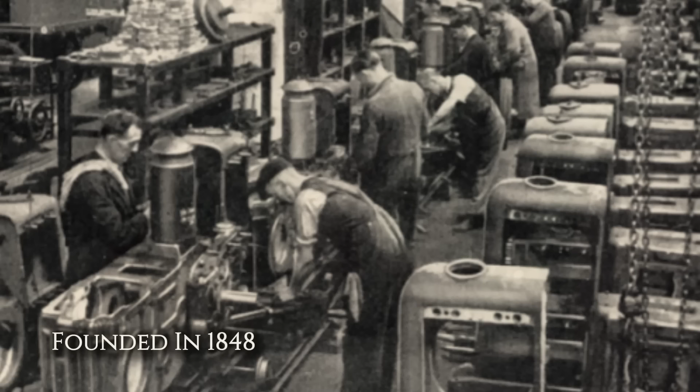Marshall of Gainsborough had been building engines since 1848 on a site that grew to employ 5,000 people and shipped its machines to Russia, Australia, and the ends of the earth. They survived the death of steam, a works fire, two world wars, and a bankruptcy that should have finished them. They came back every time. And then, after more than a century of making, the thump stopped, and the great works fell silent. How does a firm that survived all of that simply disappear?

What happened at Gainsborough? Chapter 1: The Man from Back Street. The story starts by a river.

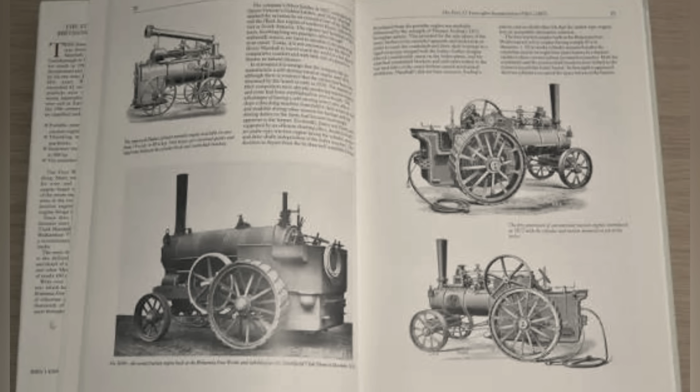Gainsborough sits on the Trent, up in the flat-top corner of Lincolnshire, and in 1848 it was a market town that moved corn and coal along the water and did little else the wider world would notice. That year, a millwright came home. His name was William Marshall. He'd been born in the town, learned his trade with his hands, and then gone away to Manchester, the loudest, fastest, most modern place in the country, where he'd worked as an agent for William Fairbairn and Sons, one of the great engineering names of the age.

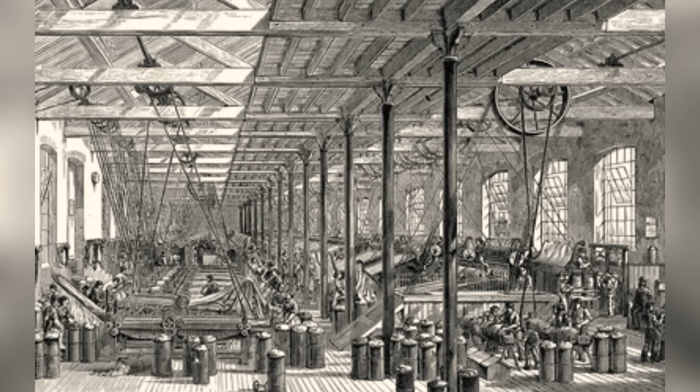He had seen what iron and steam could do at scale. And now, in middle life, with a second wife and two grown sons, he came back to the quiet town on the Trent and bought a dead business. It was a small thing—the millwright's shop of the late William Garland on Back Street, gone still after its owner's death. Marshall took it on, and almost at once he did something that tells you the whole measure of the man.

He renamed it—a modest foundry in a Lincolnshire market town—and he called it the Britannia Iron Works. Britannia, the figure of the nation herself, seated with her shield and her trident. It was an enormous name to hang over a small yard, and Marshall meant every letter of it. He wasn't building a workshop. He was making a promise about what the workshop would become.

He didn't build it alone. His son James came in as a partner in 1849, and the firm became William Marshall and Son. Four years later, the second son, Henry Dickinson Marshall, joined them too. In 1855, the family bought a stretch of land off Beaumont Street, the ground on which the real works would rise, and they made their own bricks on site to build it. Then, in 1861, William Marshall died.

He'd had 13 years. He'd seen the promise begin, and no more than begin. His sons carried it. In 1862, they turned the firm into a limited company, and under James and Henry, the Britannia Iron Works started to grow in a way their father might have dreamed of, but never watched.

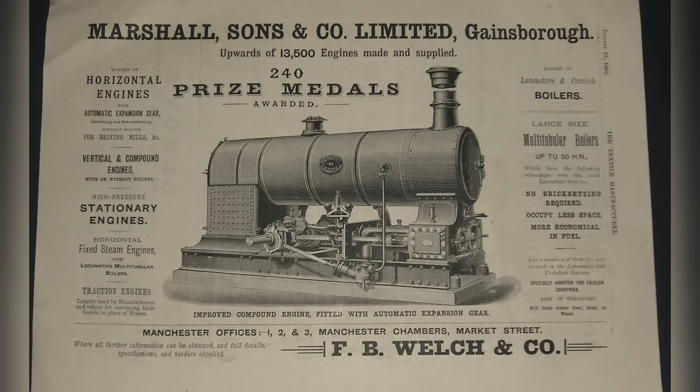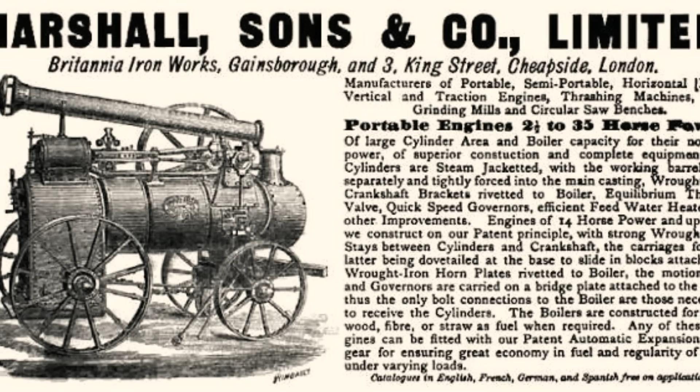The numbers tell the climb better than any adjective. In 1861, the year William died, the works employed 21 men and 10 boys, 31 souls. By 1871, it was 521 men and 85 boys. By 1881, close to 1,400 men and another 137 boys. In 20 years, a foundry of 30-odd hands had become a small industrial town of its own.

And a town it genuinely was, because the works began to reshape the place around it. So many men poured into Gainsborough looking for work at Marshall's that the town simply ran out of houses. There weren't enough homes for the wage packets the works was handing out. So in 1876, James and Henry Marshall did something that a modern employer would file under welfare and a Victorian one filed under common sense. They founded the Gainsborough Building Society so that the men who made the engines could buy the roofs over their heads.

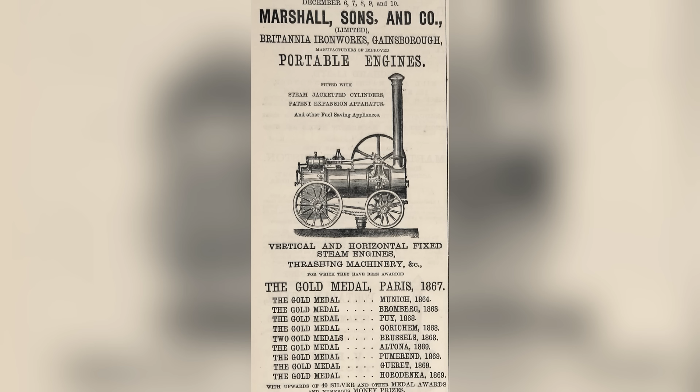By the end of 1885, the brick buildings, Marshall's own bricks, off Marshall's own land, covered 11.5 acres of a 16-acre site, and 1,900 men clocked in through the gates. The foundry on Back Street was a memory. What stood in its place was one of the great engineering works of Victorian England, and every last piece of it ran on steam. The engines that made Gainsborough famous ran on steam, and steam was about to make the family very rich indeed, before it turned round and quietly began to betray them.

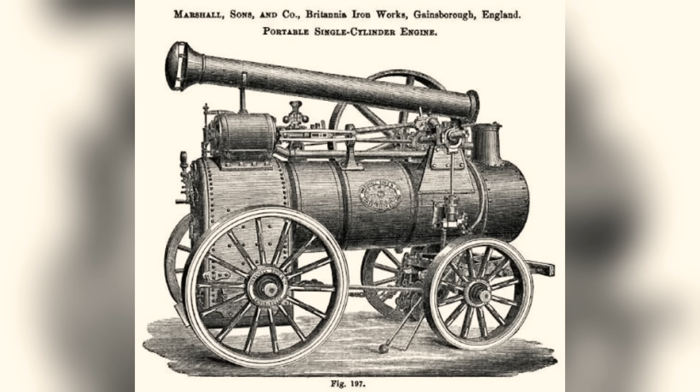Chapter 2: An Empire of Steam. To understand what Marshall's became, you have to understand what it sold and to whom, because this was never a firm that lived off its own back doorstep.

Lincolnshire was a farming county, and Gainsborough was one of a cluster of Lincolnshire towns. Lincoln itself, Grantham down the road, turned themselves into the machine shop of world agriculture. The home market was small. Marshall looked outward from the very start.

They built portable steam engines, the workhorse of the Victorian farm, an engine on wheels you could haul from field to field behind a team of horses to drive a threshing drum or a saw bench. From 1876, they built traction engines, the great self-propelled beasts that could pull their own weight, and a train of wagons besides. They built steamrollers, and in that trade, Marshall stood second in all of Britain only to Aveling and Porter. They built stationary engines and boilers up to 500 horsepower, and, in a line that tells you exactly how far this Lincolnshire firm was reaching, they built tea manufacturing machinery for the plantations of India and Ceylon.

The reach was extraordinary for its day. An order came in from Russia for railway equipment before the firm was even 10 years old. Traction engines went out to New Zealand, to Australia, to Brazil, to Germany. In the 10 years between 1878 and 1887, the works turned out 310 traction engines, and 71 of those crossed an ocean to get to work.

In 1873, at the Vienna Universal Exhibition, Marshall took a gold medal. A firm born in a dead man's yard on Back Street was now winning prizes on the great stages of Europe and shipping its engines to the ends of the earth.

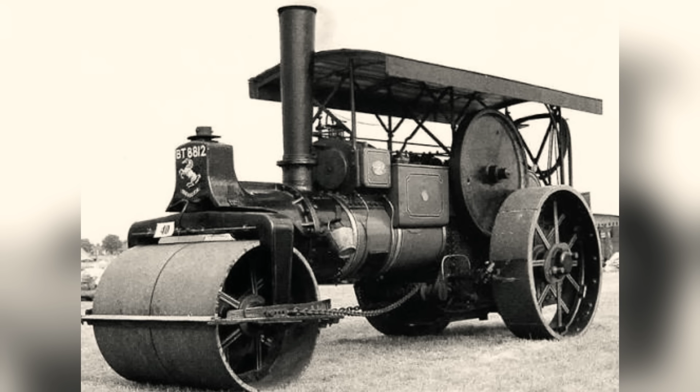The scale kept climbing. By 1907, the workforce was around 3,600. Annual sales crossed £1 million by 1916, a colossal figure for the time. Marshall's had become, by some accounts of the period, the largest factory complex in Europe. That was a claim the town was proud to make, and one you should hold at arm's length. It was the kind of boast that grew in the telling. But the truth underneath the boast was solid enough.

This was a giant. Then came the war, and the giant turned its hands to it. During the First World War, the workforce swelled to around 5,000 as the works poured out munitions, and in 1917, Marshall opened an entirely new site on Lea Road, the Carr House Works, to build aircraft, farm engines one day, fighting aeroplanes the next. That was the range of the place at its height.

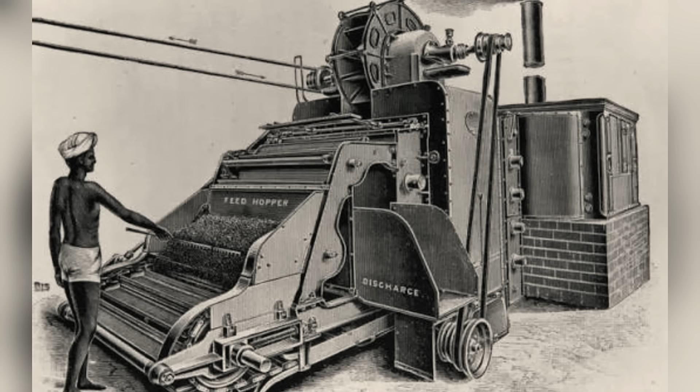But the works had already had its warning. In May 1914, before the war even began, fire tore through the Britannia Iron Works. For a firm built of its own brick and iron, a serious fire was a body blow, and Marshall's took it, rebuilt, and carried on. It survived the flames. It survived the war.

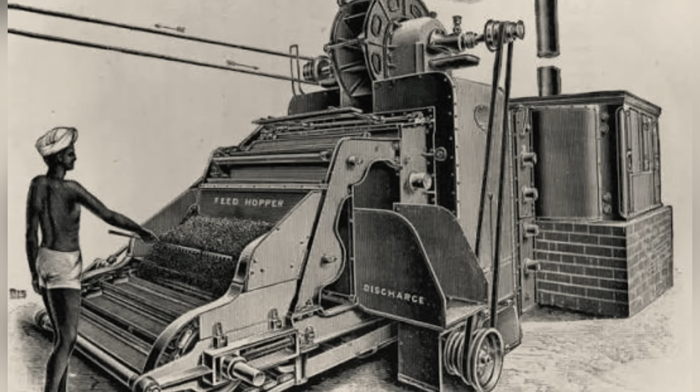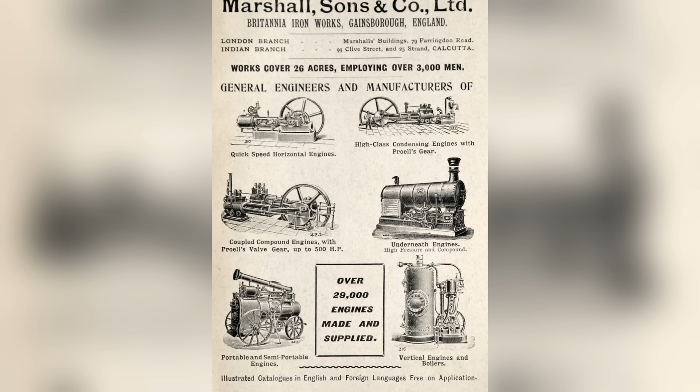What it could not survive, it turned out, was peace. Because when the guns fell silent in 1918, the world stopped buying steam. The traction engine, the portable, the great stationary boiler, the whole magnificent catalogue that had built Gainsborough, was suddenly old. The internal combustion engine was coming, lighter and cleaner and cheaper, and the export markets that had carried Marshall's for 70 years began to dry up one by one.

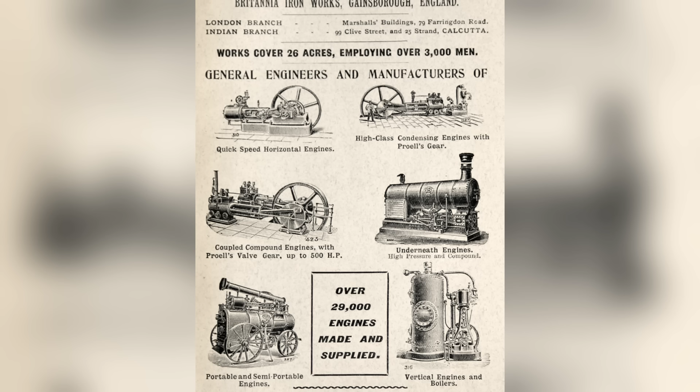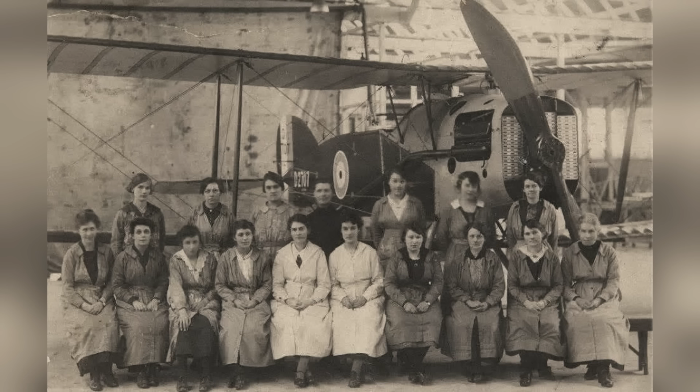The firm was not blind to it. As early as 1906, Marshall had already built its first internal combustion tractor, the big petrol-paraffin machines they called the Colonial, rated at anything from 16 to 32 horsepower, 300 and more of them shipped out to the wheat prairies of Australia, New Zealand and Canada before the war shut the line down. Marshall knew the future had an engine in it that didn't run on coal. The question was, which engine?

And to answer it, the men of Gainsborough did something their gold medal Victorian founders might have found strange. They looked to Germany, because in Germany, one particular tractor was quietly conquering the farms of the world, and it ran on a single, enormous, thumping cylinder.

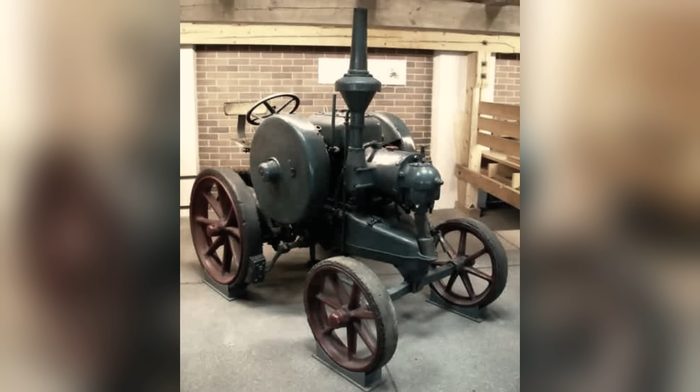Chapter 3. The One-Cylinder Gamble. The German machine was the Lanz Bulldog, and it was a phenomenon. Simple, crude, almost impossible to break, cheap to run on the roughest fuel a farmer could pour into it. The Bulldog sold in its hundreds of thousands, and it did it all on one big, slow cylinder.

To an engineer at Gainsborough, watching the steam order book collapse, the lesson looked obvious. Simplicity sold. One cylinder sold. Marshall would build a one-cylinder oil engine of its own.

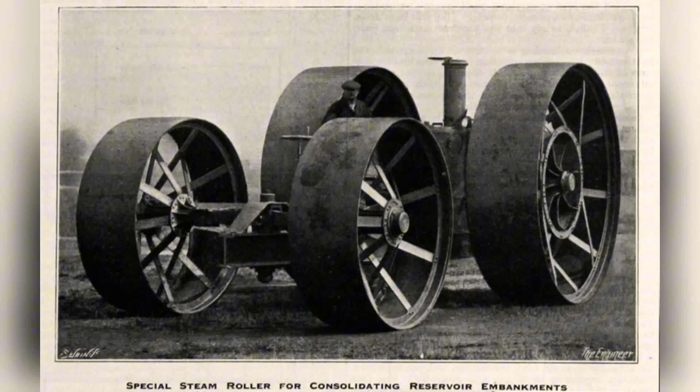But first, the firm nearly died. In 1934, with the steam trade gone and a farming slump biting hard, Marshall, Sons and Company went into receivership. The great works that had shipped engines to Russia and taken gold in Vienna ran out of money. It looked, for a moment, like the end.

It wasn't. In October 1935, the scrap and engineering combine Thomas W. Ward Limited of Sheffield bought the entire assets and kept 930 men in work.

The firm was reorganized the following year as Marshall, Sons and Company Successors Limited, with 5 Ward directors sitting on the board. A Sheffield man, Ashley Skelton Ward, would come to chair both companies. The Marshall name survived, but from 1935 onward, it survived as something owned, the first hand in a long line of hands the firm would be passed between.

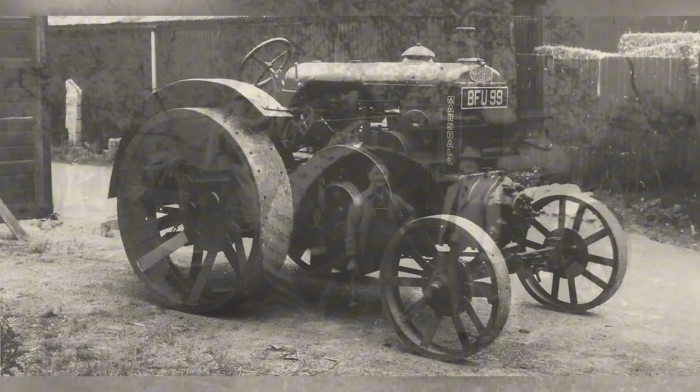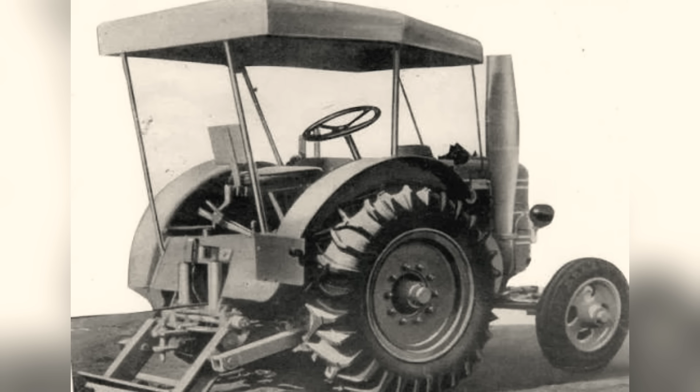Under Ward money, though, the one-cylinder gamble went ahead, and here Marshall made a choice that would define everything that followed, and that most people to this day get wrong. The German Bulldog was a hot bulb engine. It didn't fully compress and ignite its fuel the way a proper diesel does. It needed a blow lamp played on the cylinder head to warm a bulb before it would fire. Marshall looked at that and decided to do the harder, better, cleverer thing. They would build a true diesel, full compression, no blow lamp, a real oil engine of the modern kind, wrapped around a single giant cylinder.

The first of them was the 1530, the Model E, which appeared in 1930. It was a horizontal single-cylinder, 2-stroke diesel with a bore of 8 inches and a stroke of 10.5, the best part of 8 litres of engine turning over at barely 550 revolutions a minute, hauling the whole tractor along at 5 miles an hour flat out. It was enormous, it was slow, and it was troublesome. The early ones were plagued with reliability problems.

But Marshall learned. The 1830 followed in 1932. Then, in the mid-30s, came the machine that pointed the way, the 1220, smaller and lighter and cheaper. Its cylinder shrunk to a bore of 6.5 inches and a stroke of 9, spinning up to 700 revs. That basic engine, that size, that shape, was the one.

Refined into the Model M from 1938, it soldiered right through the Second World War, ploughing the fields of a country that suddenly, desperately, needed every acre it had. And that is the machine that came out of the war and got a new name. A name borrowed with a straight face from the highest rank in the British Army.

In June 1945, as the country stood exhausted and victorious and hungry, Marshall of Gainsborough put its single-cylinder diesel into a fresh set of clothes, painted it Brunswick green, and called it the Field Marshall. It would become the most beloved tractor Britain ever built, and it was, from the day it launched, already the past. Chapter 4. Thump, thump, thump.

So here is what actually happened, step by step. First, the farmer took a special slow-burning paper, soaked in saltpeter, lit it until it glowed, and screwed it into a holder in the cylinder head. That smouldering paper was not a flame thrown into the engine. That was the Lanz trick, the hot bulb blow lamp, and the Marshall was a very different beast. The glowing paper simply sat there as an ember, a source of heat waiting to help that first charge catch.

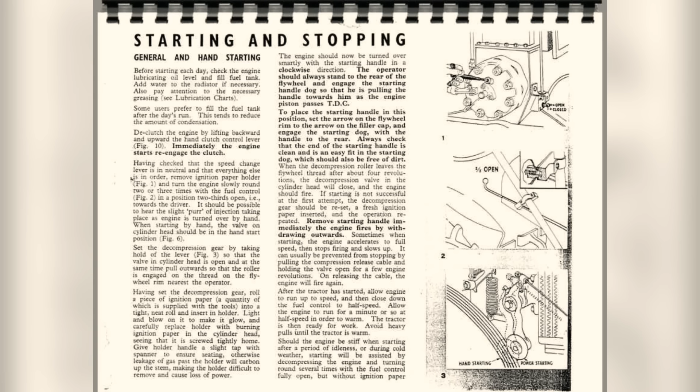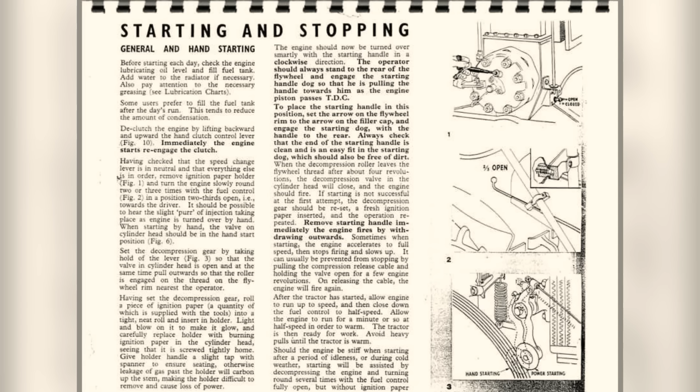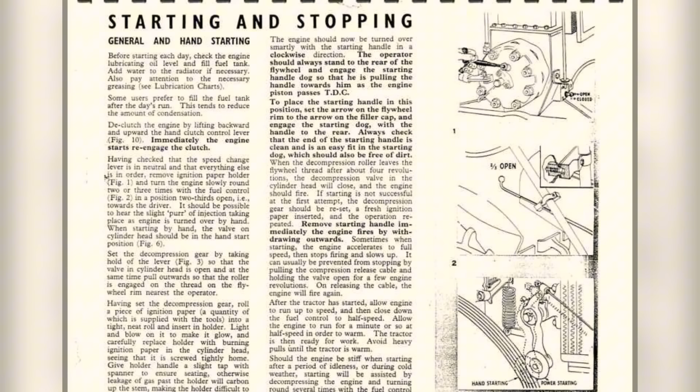Then came the cartridge, a purpose-made blank starting cartridge, the size of a 12-bore shotgun shell, and this is where the story gets embroidered, because it was never live shot, never a fired pellet, just a case full of powder. The farmer screwed it into a breech on the side of the engine and shut the breech tight. He turned the flywheel to just the right spot, a fraction before the top of the stroke, and then he took a hammer and struck the firing pin.

The cartridge went off like a gun. The blast drove that great piston down through its stroke, the glowing paper caught the fuel, compression did the rest, and the engine boomed into life in a ring of smoke and settled into the sound that a generation of British farm children would never forget.

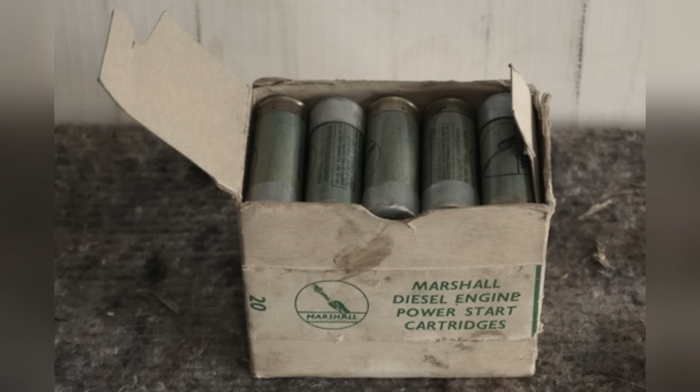Thump, thump, thump, slow and heavy, and utterly distinctive. The beat of a single enormous cylinder firing once, pausing, firing again. It came out of a tall exhaust stack and rolled across the fields for half a mile, and the tractor moved as it beat. At idle, the whole machine visibly rocked on its rubber tires, juddering back and forth as if it were straining at a leash.

Left ticking over on soft ground and forgotten, a Field Marshal could literally shake itself down into the earth. One preservationist, Peter Watkin, would remember being pulled across a field as a boy by that strange thumping sound, unable to stay away from it. It was the sound of the harvest. It was the sound of the machine that everyone loved.

There was, it should be said, a gentler way in. On a warm engine, or a mild morning with a fit pair of arms behind it, a Field Marshal could be started with a crank handle, helped enormously by a clever decompression system, a spiral groove machined into the flywheel rim that held the compression off for 3 revolutions, sometimes 6, letting the flywheel gather speed before the pressure snapped back and the engine fired.

Cartridges cost money, after all. 2 bob a pop, farmers remembered, which added up. The crank was for good days. The cartridge was for the cold ones, when nothing else would do.

But the cartridge start had a dark side, and the truth of it deserves telling straight. Firing those charges over and over caked the engine in carbon, which jammed the very decompression valve the crank starting relied on. And it could hurt you.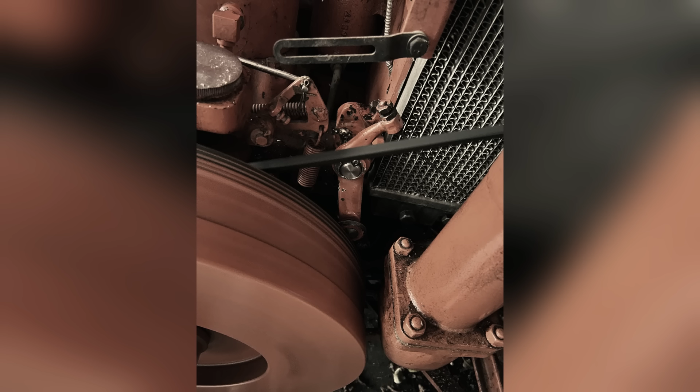At a museum in Australia there is a documented account of a man, his name was Hugh, who fired a cartridge that fizzed instead of banging. Thinking it a dud, he loaded a second and fired that. But the first charge's powder hadn't burned. It had dropped down into the starting chamber, and the second detonation set the whole lot off at once. The blast blew the cast iron chamber apart. It took his left arm off at the elbow and wrecked his right. That is the one true, named account of the danger, and it is enough.

Marshall built the Field Marshall across a decade of steady improvement. The Series 1 of 1945 gave way to the Series 2 in 1947, with 40 horsepower and a bigger clutch and better brakes. Around 7,000 of them made, the best seller of the whole family. Then the Series 3, with a proper high and low gearbox, and, at last, a hydraulic 3-point linkage. And finally, from 1952, the Series 3A, repainted from that dignified green to a bright, hopeful orange to make it look modern. Around 2,000 of those, shipped out to Australia and Argentina and France. By the time the single-cylinder line ended, Marshall had built somewhere close to 14,000 of them.

14,000 thumping, banging, rocking, unburstable machines. And every farmer who owned one loved it. That was the tragedy waiting in the wings. Because loving a thing has never once been the same as it being right.

Chapter 5. The Sound of the Harvest.

For a few years, though, it truly was the sound of the harvest, and it arrived at exactly the right moment. In June 1945, Britain was a country that had learned, the hard way, that it could not feed itself and had better start trying.

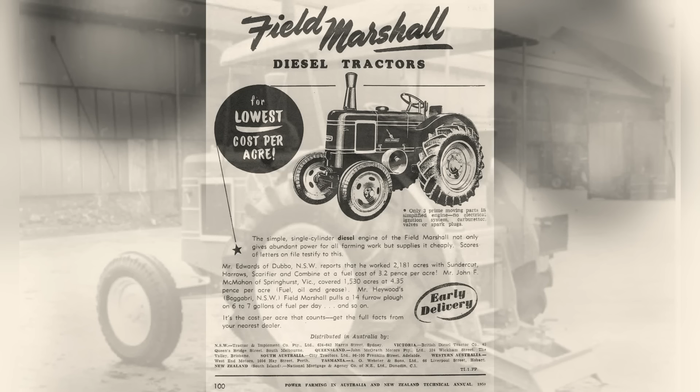Chapter 6. The Little Grey Threat.

On the 6th of July, 1946, in a factory at Banner Lane on the edge of Coventry, the first of a new kind of tractor rolled off the line. It was small, it was light, it was painted a plain, unglamorous grey, and it would end the world that Gainsborough had just so carefully rebuilt. The man behind it was Harry Ferguson, an Ulsterman of ferocious stubbornness, who had spent the better part of 30 years chasing a single idea.

He had watched horses and early tractors drag ploughs across fields, and he had understood something the industry hadn't, that the tractor and the implement behind it should not be two separate things dragging at each other, but one machine. His answer was hydraulics, a three-point linkage that lifted the plough, controlled its depth, and let the tractor and the tool work together as a single body. It was called the Ferguson system, and it was one of the most important advances in the history of farming.

The little grey Fergie, the TE20, put all of it into a package a modest farmer could actually afford, around 20 horsepower, 4 cylinders, smooth and easy. It started on the turn of a key, and it cost roughly half what a Field Marshall cost.

Set the two machines side by side in 1947, and the contest was already over, though it would take years for everyone to admit it. On one side, a heavy, costly, single-cylinder monster, you started by hitting a shotgun cartridge with a hammer and preheating with a smouldering paper. On the other, a light, cheap, brilliantly clever machine, you started with a key and drove home the same afternoon.

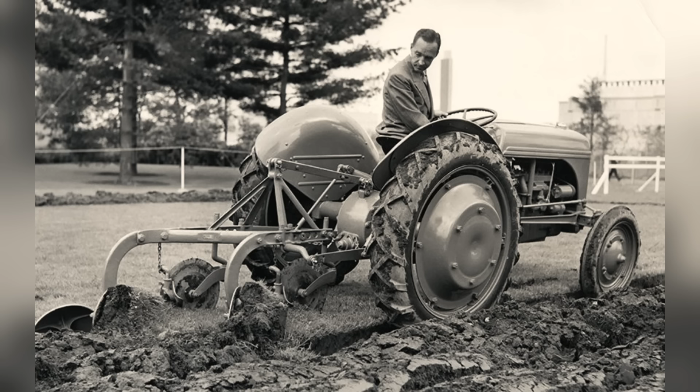The numbers, when they came, were merciless. By the time the last TE20 was built in 1956, Ferguson had made 517,651 of them. Marshall, across the entire life of its single-cylinder tractor, built around 14,000. For every Field Marshall that thumped out of Gainsborough, Ferguson built more than 30 little grey tractors, and Ferguson was not alone.

The Fordson Major arrived in 1945. Nuffield came in. David Brown, International Harvester. The whole industry was moving to light, multi-cylinder, easy-starting machines, and the ordinary British farmer went with them.

Here is the hard question, and it deserves an honest answer. Why did Marshall keep building the single cylinder for another decade, right up to 1956? Not out of stupidity. The men at Gainsborough weren't fools. They kept building it because it still sold, to the contractors who loved its unstallable torque, to the export markets in Australia and Argentina and France who wanted a machine that would run on anything and never break.

There was real loyalty out there and real money in it. The single cylinder had a genuine, defensible niche, but a niche is a small room, and the mainstream had walked out of it. While Ferguson and Ford were selling tractors to the whole country by the 100,000, Marshall was selling a beloved specialist machine to the few who still wanted one. The love was real. The market was not.

Marshall's engineers could see it. They knew by the early 1950s that the age of the great single was ending, and they needed a modern tractor to replace it. They were right about the problem. In 1954, they set about solving it, and they gave the world precisely the wrong answer.

Chapter 7. The six-cylinder mistake.

The logic seemed sound at the time, which is what makes it a tragedy rather than a blunder. Marshall knew the single cylinder was finished. It knew it needed a modern tractor with more than one cylinder. But designing a whole new engine from scratch was expensive and slow, so Marshall decided to buy one in and build a big tractor around it.

The project began in 1953 as the MP4, planned around a four-cylinder Meadows diesel. Then somebody judged that it needed more power. So Marshall switched to a six-cylinder Leyland diesel of around 70 horsepower, and the machine became the MP6, announced in November 1954. It was built along the lines of the Fowler Challenger crawler with a great hull-shaped chassis.

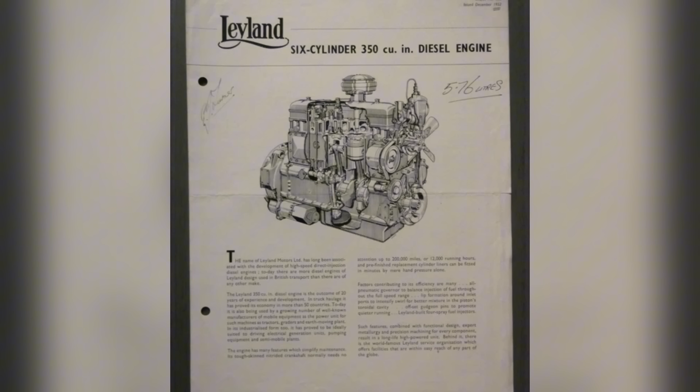It was powerful. It was substantial. It was, in every sense that mattered, wrong. Because 70 horsepower in the mid-1950s was enormous, far too much tractor for the small, hedged, awkward fields of British farms. The MP6 was a machine built for the wide open acres of America, and Marshall had almost no way to sell it there.

Full production didn't even begin until around 1956, by which time the moment had passed. The early ones suffered cracked rear bull gear housings, a fault that did nothing for a reputation the tractor never had time to build. The final tally is one of the saddest numbers in the whole story.

Marshall built 197 MP6 tractors. All but 10 of them were exported, because there was scarcely anyone in Britain who wanted a machine that size. 197, against Ferguson's 500,000, it is barely a rounding error, and there is a coda to the MP6 that says everything about the gap between what a thing is worth and what it earns.

Decades later, one of the surviving prototypes, the very last of the MP4 to MP6 conversions, came up for auction at Cheffins. It sold for £66,500. The machine that failed so completely in its own time had become a curio worth a small fortune, valued far more by collectors mourning a lost era than it had ever been valued by the farmers it was built for.

With the MP6 failure, something quiet and final happened at Gainsborough. Marshall stopped designing tractors. The firm that had gambled on one cylinder and won a nation's affection, then gambled on six and lost, simply stepped away from the game. From here on, the story is no longer about what Marshall made.

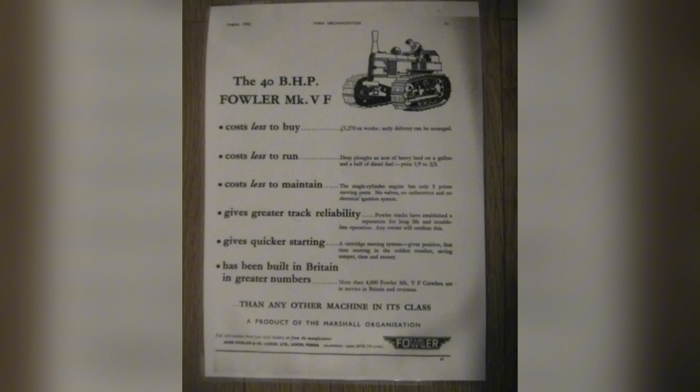Through the late 1960s, the Marshall Group was pulled fully into the Thomas W. Ward organization, trading from around 1969 as Marshall Fowler Limited. Then, in the early 1970s, the Leeds works closed and everything was concentrated at Gainsborough. A century of Fowler history in Leeds ended, and the men there went home.

Consolidation always sounds tidy in a boardroom. On the ground, it means gates closing and families losing wages.

In September 1975 came the biggest hand of all. British Leyland, the sprawling, troubled, state-backed giant of British motor manufacturing, bought the Gainsborough operation from Thomas Ward for £3 million. Marshall Fowler was merged with Aveling Barford to form Aveling Marshall, a maker of crawlers and wheeled loaders run out of the British Leyland Special Products Division, with its headquarters miles away at Melton Mowbray.

And now the story tells you exactly what it feels like to become a line item. The men in Gainsborough no longer worked for Marshall. They worked for a division of a subsidiary of a nationalized conglomerate that was, at that very moment, fighting for its own survival in the car market.

That fight is what did it. By 1979, British Leyland was hemorrhaging money on its core business and needed cash from anywhere it could find it. So it began shutting and selling the parts that weren't cars. Aveling Marshall was broken up, and the crawler business, the old Track Marshall line, the tracked descendant of the Field Marshall itself, was bought out of the wreckage by a Lincolnshire farmer and businessman named Charles Nickerson.

Remember that name, because Nickerson was not finished with Marshall. He had just bought the crawlers, and he had rescued a piece of Gainsborough from a distant conglomerate that didn't want it. To the town, it must have looked like a local man bringing a local firm back home. In a small way it was, but Nickerson had a larger idea forming.

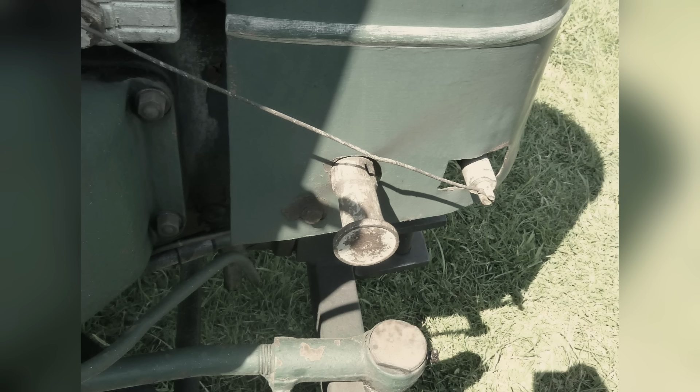The Marshall Club and the Gainsborough Heritage Association keep the records and the memory. On Father's Day, preserved field marshals come back to Marshall's yard itself and thump away on the very ground where they were made, beneath the statue of Britannia, where a woman shopping for a Sunday roast can stop and hear the sound her grandfather worked to.

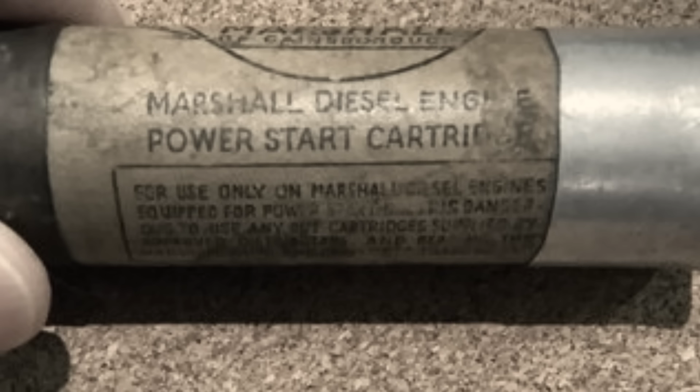That is the strange, bittersweet ending of it. William Marshall came home to a river town in 1848 and hung an impossible name over a small yard. His sons built it into a giant. The giant gambled on one enormous cylinder and won the love of a nation's farmers with a machine you started by hitting a shotgun cartridge with a hammer, a machine that was, from the very first day, already being made obsolete by a cheap grey tractor and the turn of a simple key.

The firm was passed from hand to hand until a local man brought the name home to Gainsborough, at the cost of a Scottish town's work, only to see it fail on the ground where it began. The company is gone. The works is a shopping centre, but the sound is still here. On a summer afternoon, on a patch of Lincolnshire ground, the thump of the field marshal still drifts across the field, the sound of a lost Gainsborough, banging stubbornly on, long after everyone said it should have stopped.